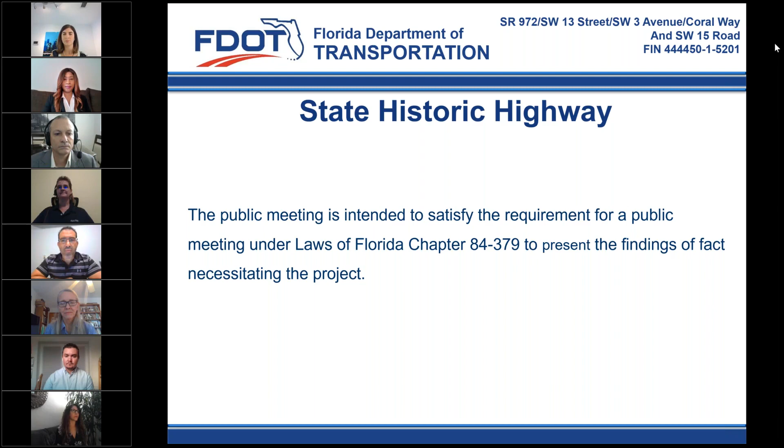Florida Department of Transportation is required to comply with various non-discrimination laws and regulations, including Title VI of the Civil Rights Act of 1964. Public participation at this meeting is solicited without regard to race, color, national origin, age, sex, religion, disability, or familial status.

Persons wishing to express their concerns about Title VI may do so by contacting our District 6 Title VI Coordinator, Ms. Irene Varela, at 305-470-5342, or in writing, FDOT 1000 Northwest 111th Avenue, Miami, Florida 33172, or by email at irene.varela@dot.state.fl.us. Or you can reach your state Title VI coordinator, Ms. Jacqueline Paramore, at 850-414-4753, or in writing at the Equal Opportunity Office, 605 Suwannee Street, MS 65, Tallahassee, Florida 32399, or by email at jacqueline.paramore@dot.state.fl.us.

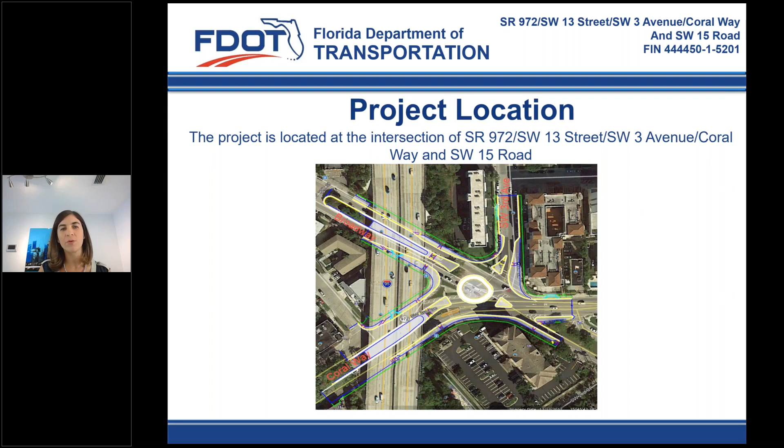Good evening, everyone. My name is Natalie, I'm the project manager for this project. As you can see here, we have the project map. It is located at the intersection of Coral Way, Broadway Street, and 3rd Avenue. This intersection is an important junction within the city of Miami and a unique confluence of several streets.

In order to address existing operational deficiencies, reconstruction of the intersection is required, and the roundabout is the preferred alternative. The roundabout will provide greater access to the immediate area and also improve pedestrian mobility. Municipalities in this area include the City of Miami.

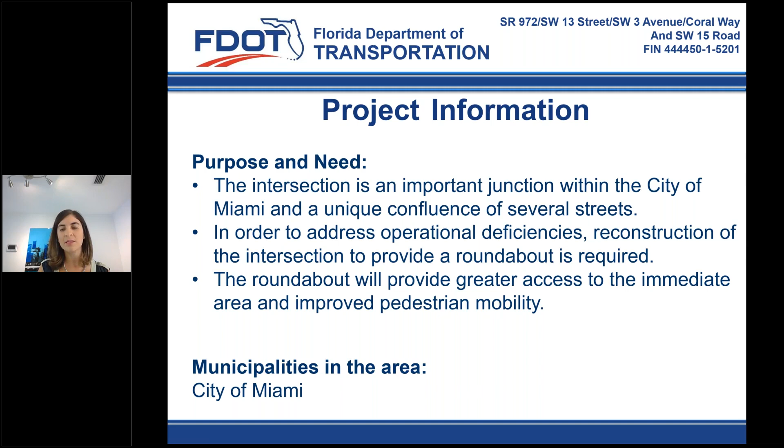Here we have an approximate schedule for the project. We have a production date of August 2022, a letting date of January 2023. Construction start date will be June 2023, and the duration is approximately 240 days. These 240 days are an estimate, as we are currently at the 60% design phase, and also do not include any weather days. The construction end time is approximately February 2024, should there not be any issues with construction weather days. The total construction cost is $2.5 million.

As mentioned before, the project is currently at 60% design phase. We are working with the municipalities to review the plans, receiving feedback from the public, and transitioning to the construction team.

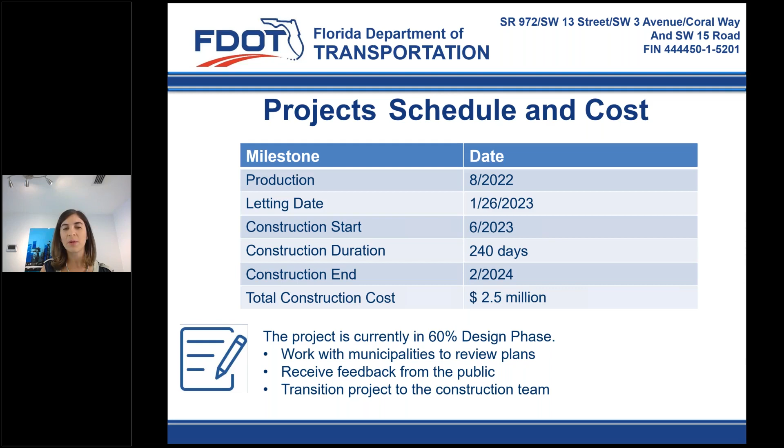The scope includes reconfiguring the existing 5-legged intersection into a 2-lane roundabout. We'll be constructing 10-foot wide sidewalks throughout the roundabout, adding high-emphasis crosswalks at 3rd Avenue, Coral Way, and 15th Road, upgrading signing and pavement markings, adding LED streetlights throughout the intersection, enhancing the existing drainage system, and eliminating approximately 14 parking spaces along 3rd Avenue.

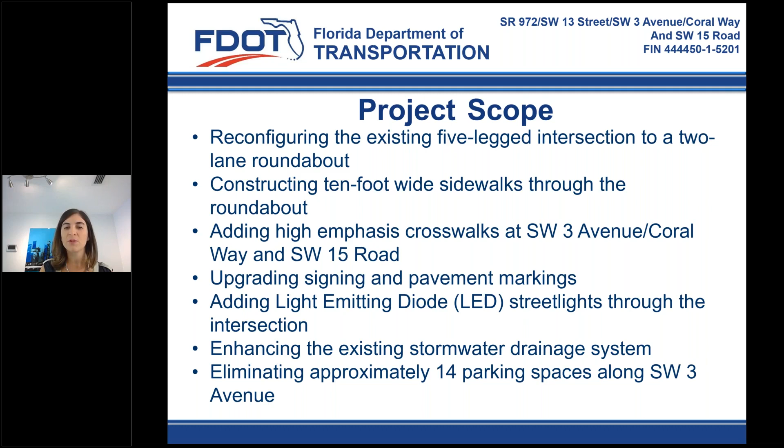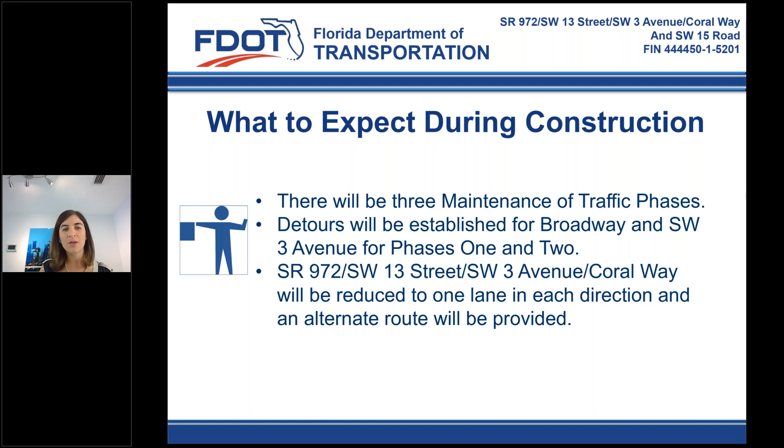What to expect during construction: there will be 3 maintenance of traffic phases. Detours will be established for Broadway and 3rd Avenue for both phase 1 and 2. Coral Way will be reduced to 1 lane in each direction and an alternate route will be provided.

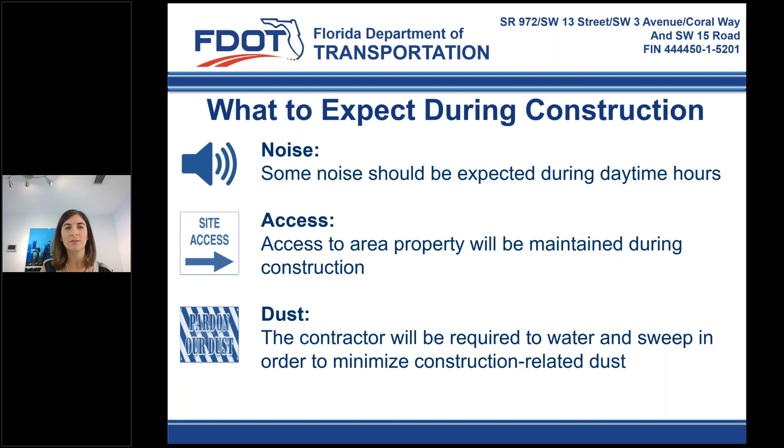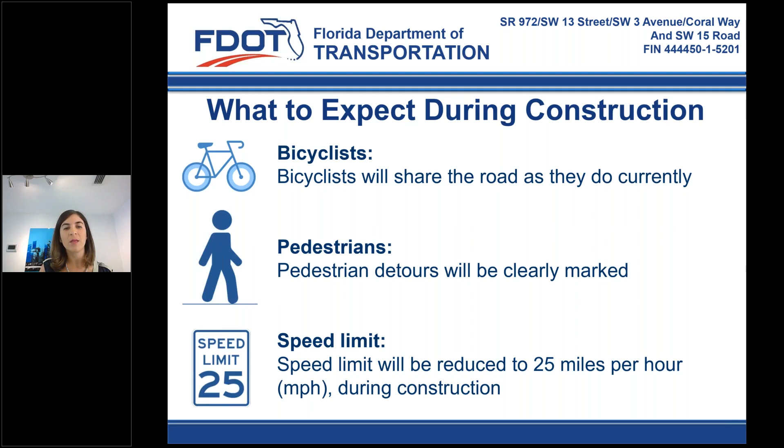You should expect some noise during daytime hours. Due to the residential areas, no nighttime work will be performed. Access will be maintained to each property, both residential and commercial, throughout construction. Dust will be required to be watered and swept in order to minimize construction-related dust. Bicyclists will need to share the road as they do currently throughout the intersection during construction. Pedestrian detours will be clearly marked. The speed limit will be reduced to 25 miles per hour.

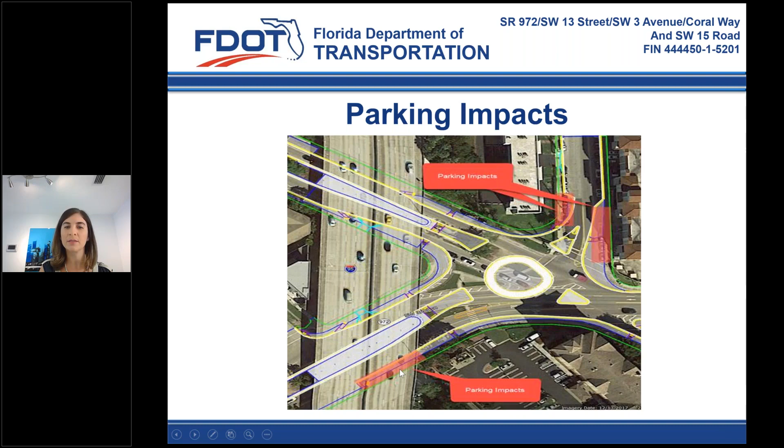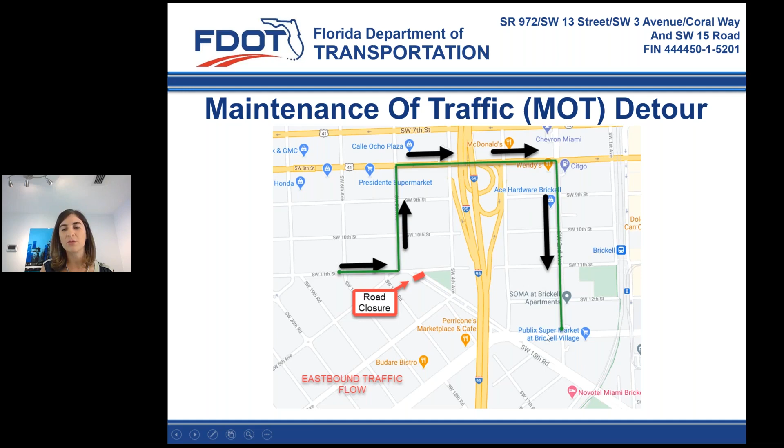This sketch shows a preliminary MOT detour for the closure of Broadway Street. As you can see, vehicles traveling down Broadway to get to Coral Way will need to turn on 5th Avenue, then make a right on 8th Street and another right on 2nd Avenue to get back onto Coral Way. Another possible detour for the closure of Broadway, for Coral Way southbound drivers, would be to make a right on 15th Road and then another right to get back onto Broadway.

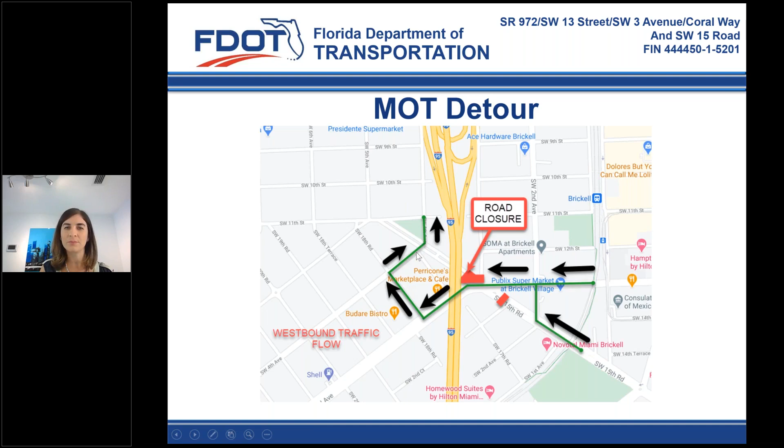Coral Way is designated a state historic highway from Southwest 37th Avenue to I-95 per Chapter 84-379. The historic law requires that no changes be made to the existing pavement width, and that any trees with trunks greater than 6 inches in diameter that are removed shall be replaced.

Within the limits of the historic highway, the existing pavement width will remain. Curb and guardrail will be added and sidewalks will be replaced at the same location. One trumpet tree and a queen palm will be removed. The trees will be replaced through our proposed landscape project that immediately follows our roadway construction. We will not be affecting any banyan trees with this project.

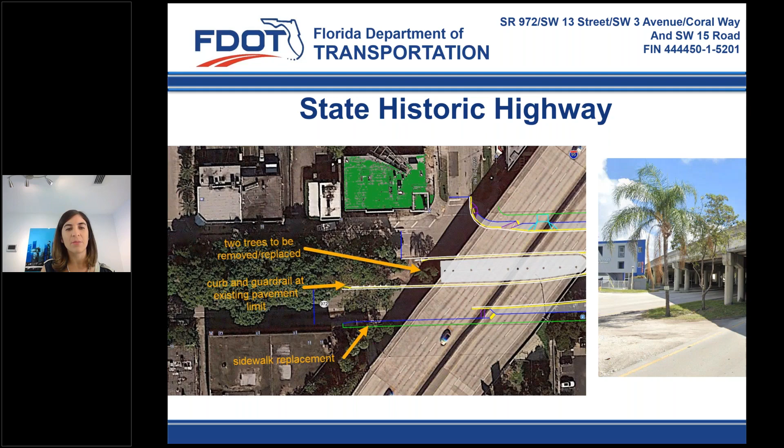As you can see here, we have the sketch of the state historic highway limits. The portion to the west of I-95 is what falls under the State Historic Highway. Highlighted are the 2 trees that are to be removed, and to the right you have a picture of both trees. The curb and guardrail will be added at the same location as the existing pavement, and the sidewalk will be replaced.

Here we have a rendering video of what the roundabout will look like. This video shows only the proposed improvements, and does not include existing features such as the banyan trees that we will not be touching with this project.

This intersection is the Coral Way westbound leg, and as you can see, there will be high emphasis crosswalks with a pedestrian refuge. All of the crosswalks in this intersection will be pedestrian actuated, meaning when you're ready to cross, you press a button and a light turns red, allowing you to cross safely across both legs of the intersection.

The center of the roundabout will be illuminated with LED decorative lighting as existing now in the area, and landscaping will be provided via a follow-up landscape project that is to immediately follow our roadway construction.

3rd Avenue will also provide a pedestrian crosswalk, with a protected signal phase and a refuge in the middle island. The Coral Way eastbound leg will need to use the existing mid-block crosswalk that exists today and will not be impacted.

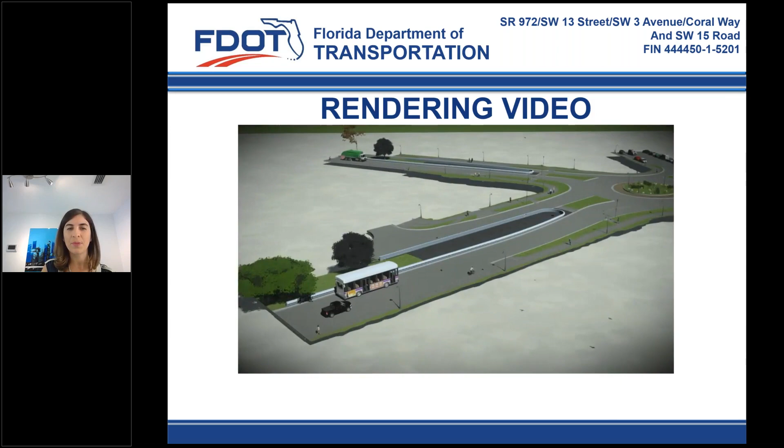And here we have a video of how to navigate a roundabout.

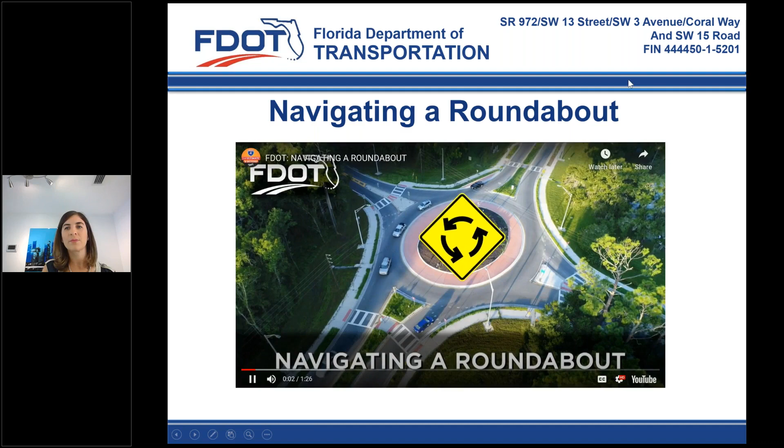When approaching a roundabout, slow down and yield for pedestrians or bicyclists in the crosswalks. Then yield to traffic already in the roundabout. Merge into the roundabout when there is a safe gap in traffic. Traffic in the roundabout has the right of way.

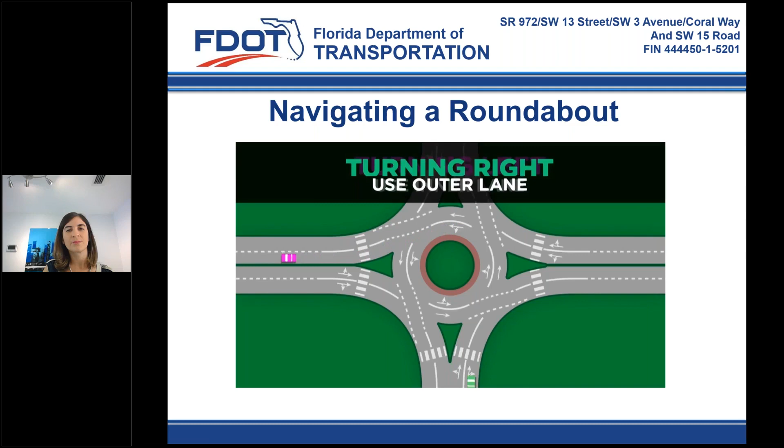In most cases, a roundabout is just like a traditional intersection. If you want to make a left, stay in the left lane. Stay in the right lane to make a right. You can use either lane if you want to go straight.

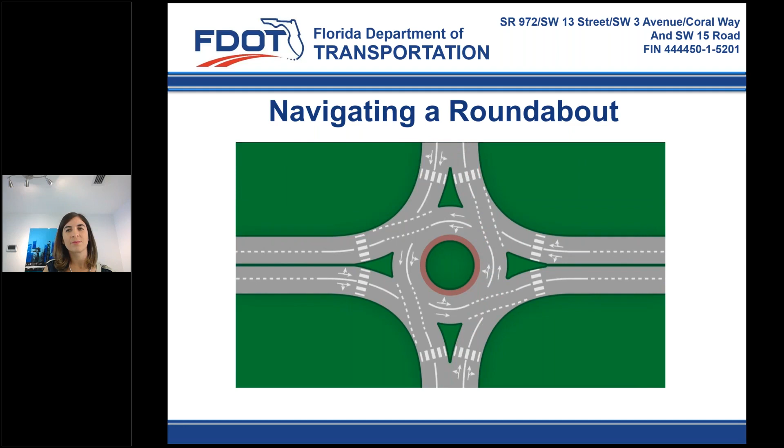However, be sure to pay close attention to the signs at the roundabout, which will guide you to the correct lanes. Roundabouts are able to accommodate large vehicles like trucks and buses by use of a truck apron. The truck apron gives larger vehicles more room to make wider turns around the roundabout.

To learn more about roundabouts, visit fdot.tips/roundabout.

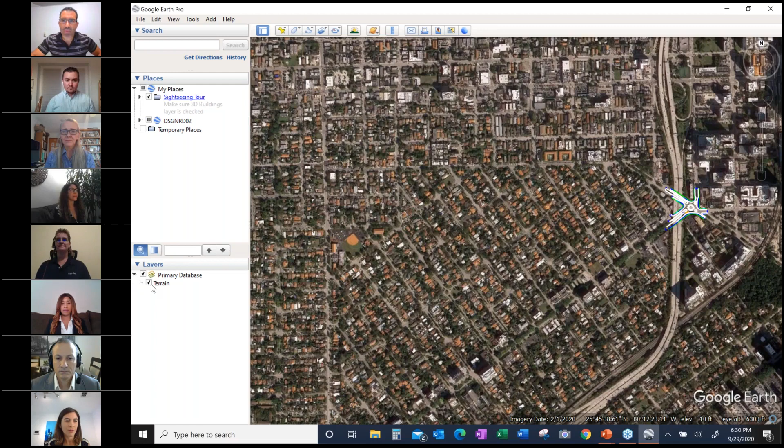The alternate route provided as well for the Coral Way lane closure will be through state roads. Let me zoom out here for a second. Sorry about this, let me turn on the street names so you could have an idea. Okay, I guess it's not working. All right.

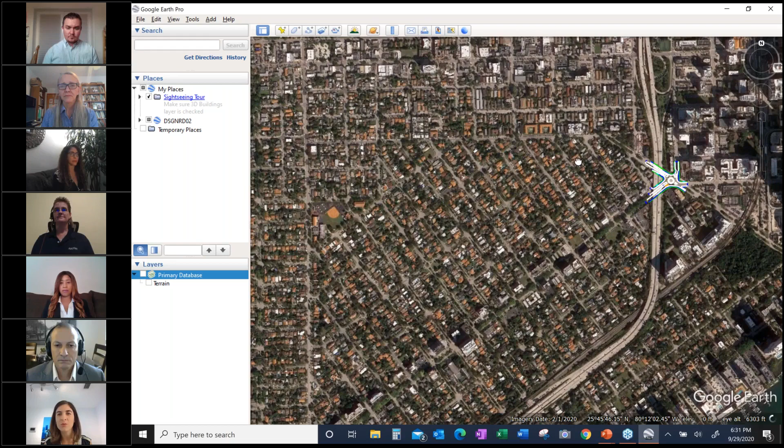Okay, so the alternate route will be here, through what I believe is 12th Avenue and then through 8th Street, which are both state roads. We will not be providing any detours for trucks that are not on state roads.

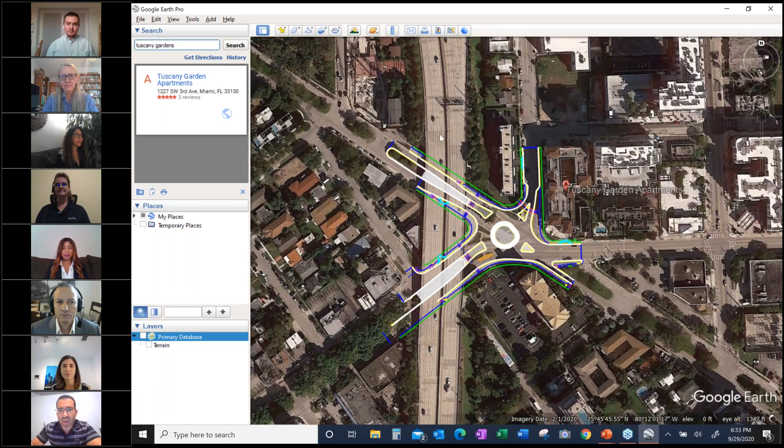Okay team, we have another question here. This is from Anna Kristen Armigo. We manage Tuscany Gardens, which, team, that's the apartment right across the street from Mr. Andrews, at 1227 Southwest 3rd Avenue, the 6th floor building right on the new construction. Would this project be blocking our pedestrian entry? It is located in the area, in quotation, of parking impacts.

No, we will not be impacting any pedestrian entrance. In the area of the parking impact, we will have, between this blue and green, an existing sidewalk. The elevations will match the elevation of the existing sidewalk that you have today. So there won't be any impacts to any pedestrian entrances along this area.

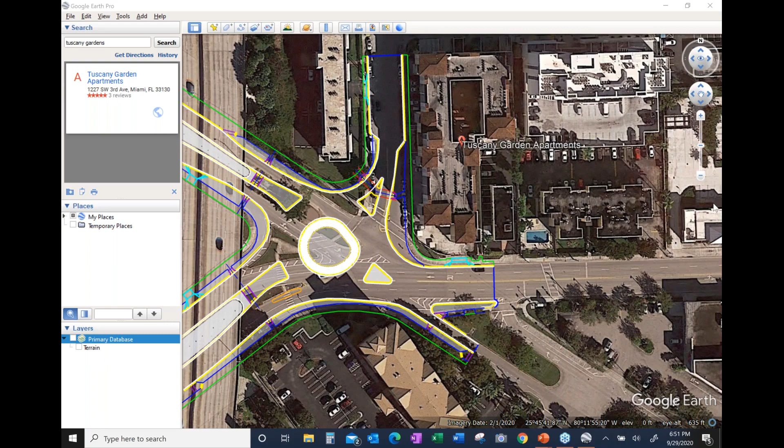Hey team, we do have a question here from Mr. Ray H. He would like to know when construction is anticipated, team.

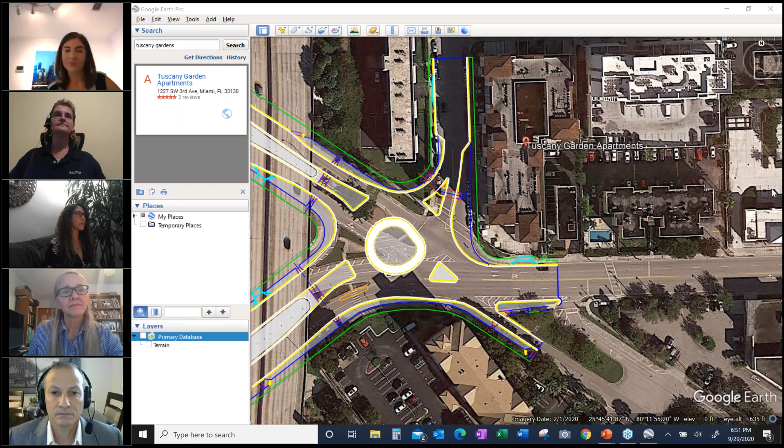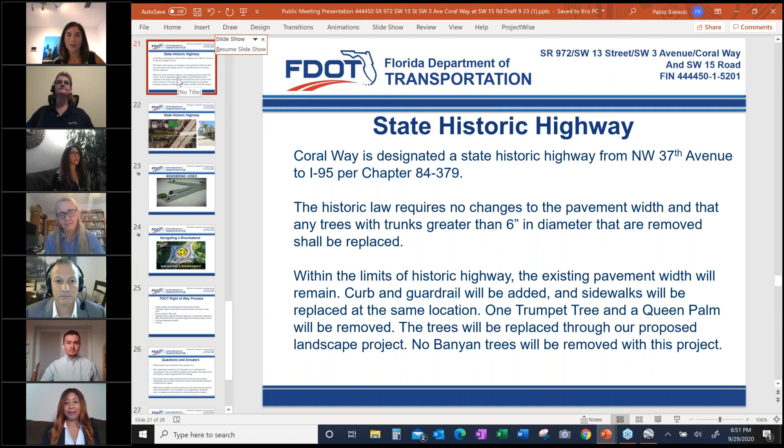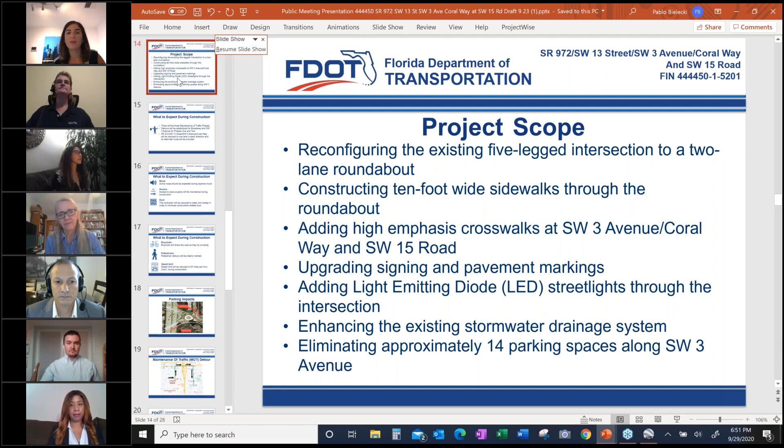This contract is being let as an A+B contract, which means it will be competitive based on the scheduled days. So what that means is we're trying our best to get in and get out, and the contractor will be selected largely based on the schedule they provide. The fewer days they provide, the higher their chances of being selected for the job. However, we won't know that schedule until the bids are out, which will be approximately January or February of 2023. So as of now, we have to go with the 240 days we've estimated.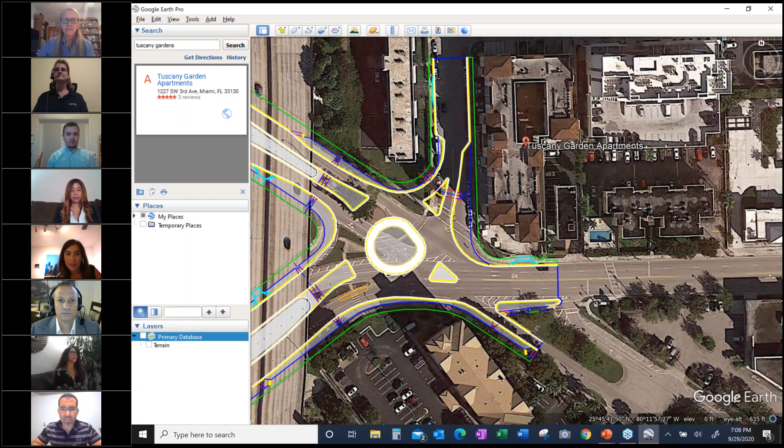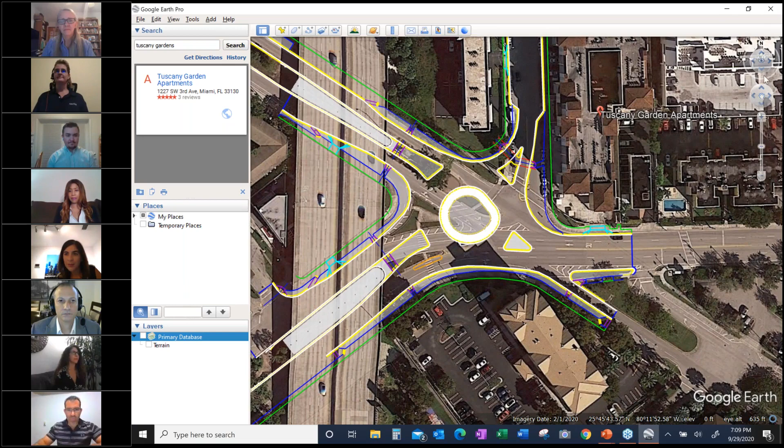We will be eliminating a couple of trees in this project just because of the roundabout location. You see this tree here and this tree here will be eliminated. Then these two trees will be eliminated, and along Coral Way there's two palm trees right here next to I-95 that will be removed as well.

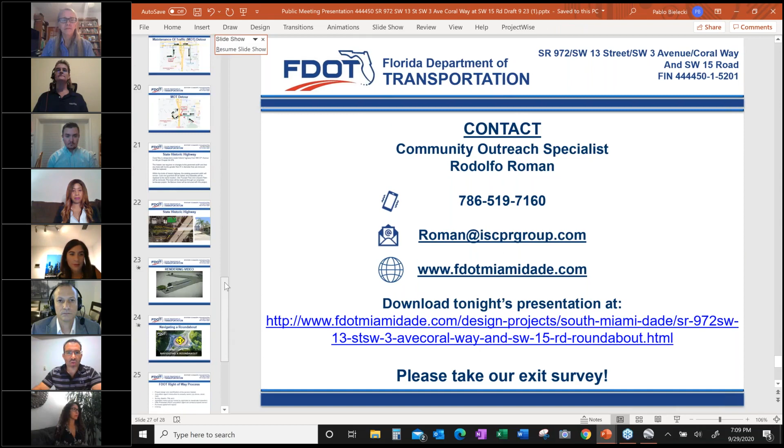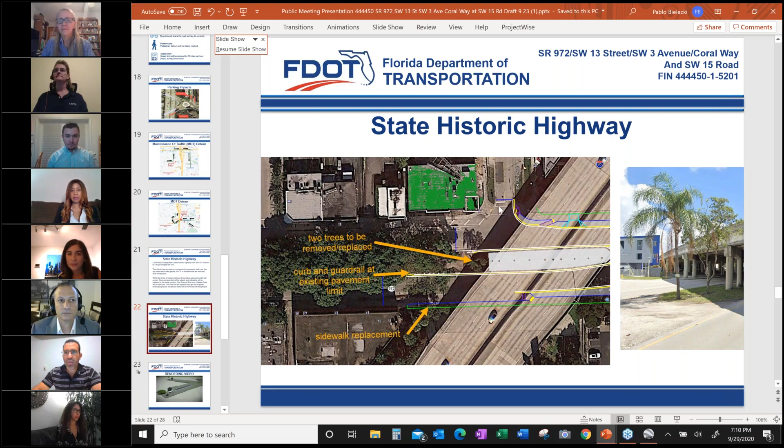I have a picture of them here on the PowerPoint. This isn't working. If it's slow on you, Natalie, I can show it here on Google Earth instead. Yeah, bear with me, let me get on there.

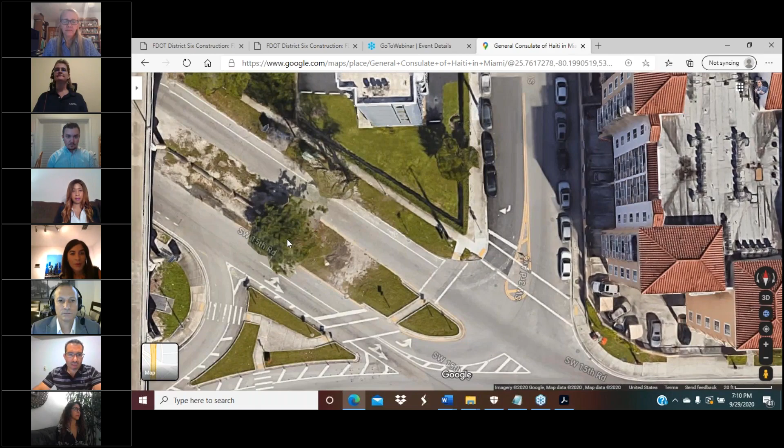So these trees, correct? These trees here, Natalie? Yes, those two trees removed. And then the trees there. Here, right? Yes, those two trees will also be removed as well.

We will have a landscape project that is going to immediately follow our roadway construction project, and it will be replacing trees. The roundabout does provide a lot of green area that doesn't exist today, so there will be a lot of landscape opportunities within the proposed projects for new trees.

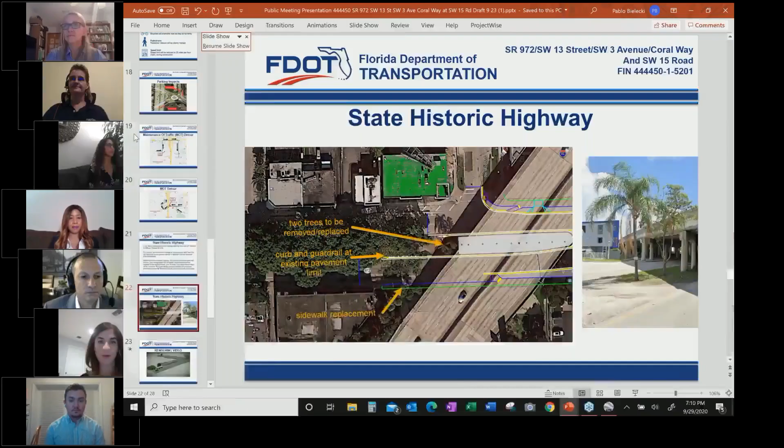Let me pull up the Google map, Natalie, just give me one second here so you can reference it, and I could pull up exactly what he's talking about. If you want, I could pull it up with the proposed overlay. Let me give you access. Do you see my screen? Not yet, hold on. Are you able to see it now? I see it, yeah.

So now, due to the signalized intersections, you have a lot of queuing at the intersections, but the roundabout will alleviate the issue because it's going to be free flow traffic. Currently, I believe it's operating at a level of service E, which is very poor and expected to get worse if the signal were to remain. But with the projected traffic increasing and the roundabout in place, it will take the level of service at the intersection to a level of service A, which is a big difference.

Having said that, to account for the volumes of traffic in the morning and afternoon from Brickell, we will be installing ramp metering signals at these approaches to ensure that there's not enough traffic that it'll block the roundabout, because if it were to block the roundabout, then all the movements would be compromised.

So we will be installing those signals. The idea is that they'll be green for most of the day, but during peak hour periods where you have backup along Coral Way, if somebody is crossing the mid-block crosswalk and you have backup here that'll get into the roundabout, it'll trigger the metering signal to change it to red. As soon as that clears up, it'll turn back to green and the roundabout will be free flowing once again.

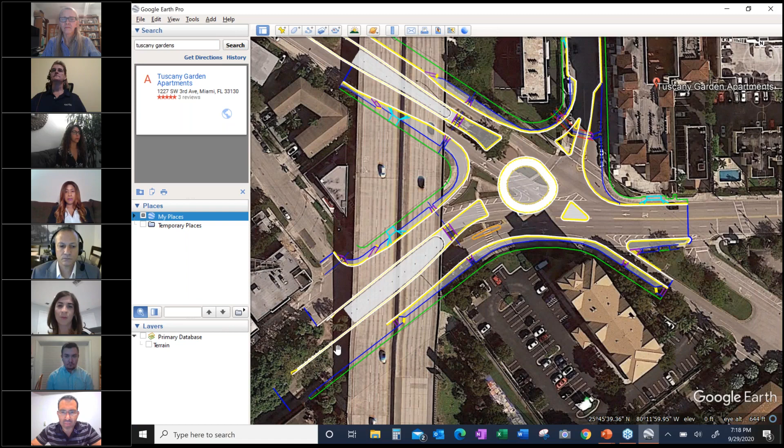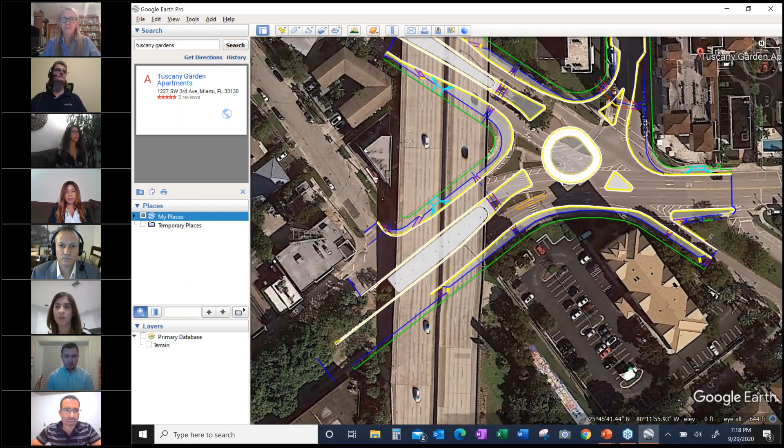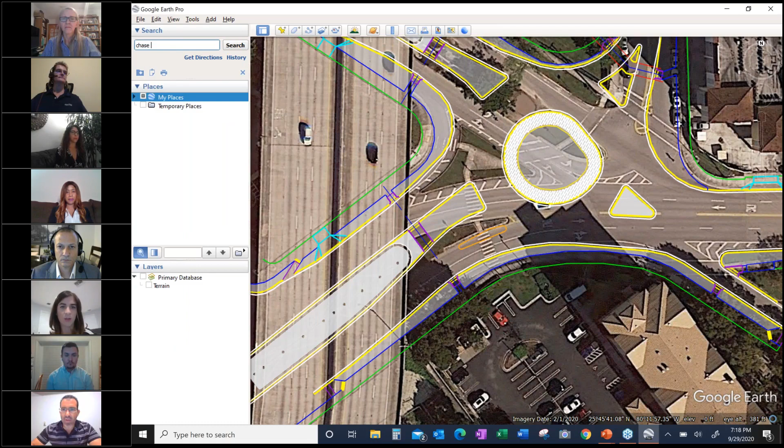So let me, can you zoom in on your Google Earth, or do you want me to do it on my end? Okay, zooming in, let me pull up the area. So they're going eastbound on Coral Way, making a left onto which street? Let me put this up real quick, the Chase Bank over here.

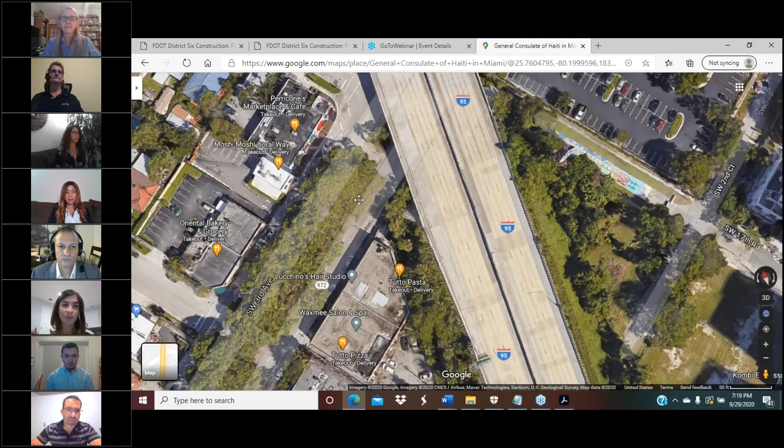Okay, so here, you guys see that there? All right, so here we have Tutto Pasta, Tutto Pizza. They're going east. And then we'll look at the Chase Bank, let's see where it is on here. That's the Chase Bank, right here.

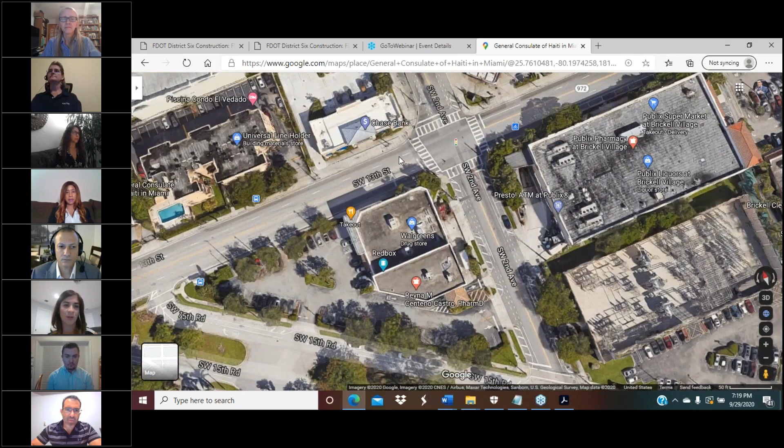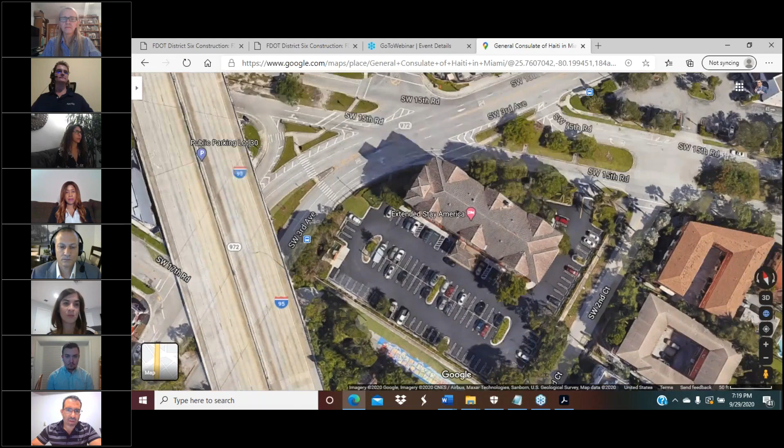So he's talking about, I'm on Coral Way, making a left at, oh sorry, right here. Let me just zoom out. Here you go, here's the Chase Bank, and here's Tutto Pizza and Tutto Pasta.

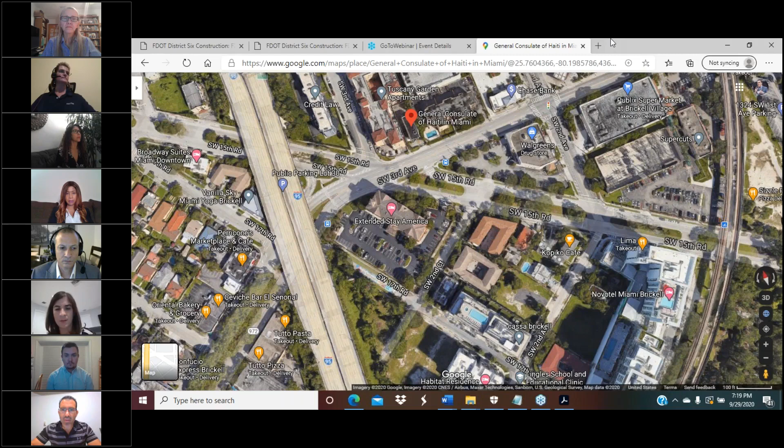Okay, now is the question. There is no left turn signal there, he says, at the Chase Bank. Yeah, let me go into the Chase Bank. Here, zoom in, the Chase Bank. Right. Okay, and then he said traffic backs up to Tutto Pizza in the morning, and he says yeah, this light. So this is the area he's referring to right here. There's no left turn.

So the traffic is backing up when coming east. So because nobody is allowed to make, I don't really understand the question. Is it because nobody is allowed to make the left, or is it because it's not a protected signal so they can make the free flow left?

Let's see, he's gonna be, once again, I'm gonna read it again. When there was a lot of traffic going east on 3rd Avenue, early mornings and rush hour, traffic backed up to Tutto Pasta and Pizza. This happened especially because there is no left turn signal at the traffic light at Southwest 3rd Avenue and Southwest 2nd Avenue. If no left turn signal is put in place, the roundabout will be closed. So yeah, so this is if I'm traveling east.